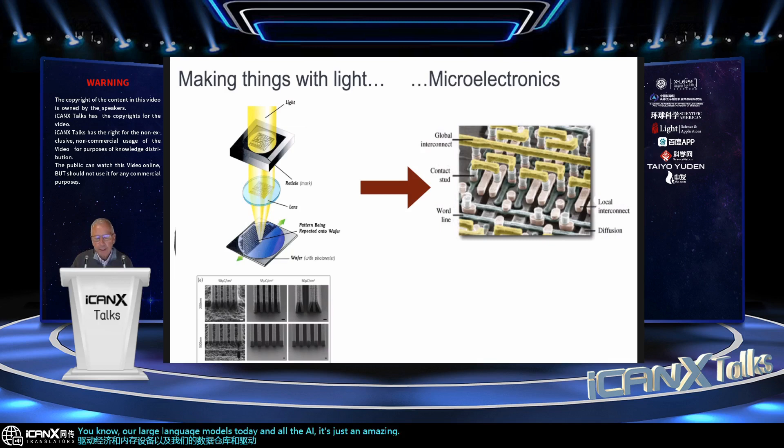And this is the foundation for building some of the most complicated structures that humans have ever fabricated at a really small length scale that looks like a city of streets and buildings. These are the integrated circuits that drive the economy and memory devices and our data warehouses and driving our large language models today and all the AI. It's just an amazing technology that's had its roots over the years.

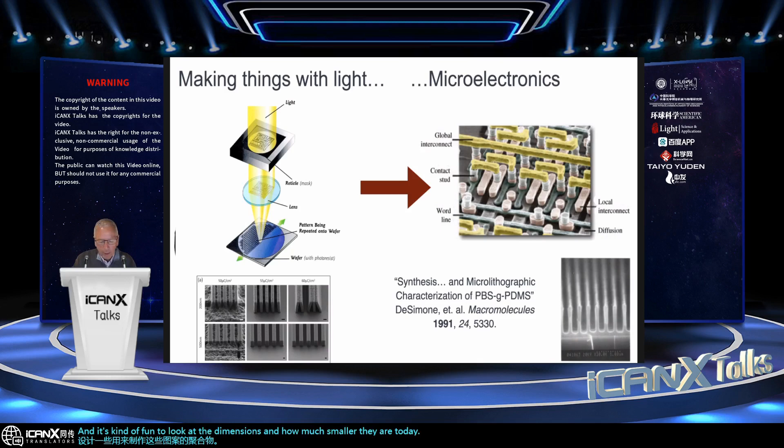And this was my first paper shortly after I got my PhD, when I already started my first faculty position, designing some of the polymers used to make these patterns. And it's kind of fun to look at the dimensions and how much smaller they are today relative to where they were when I started. So this is the area of microelectronics and photolithography.

And just to capture it a little bit more clearly, this is a wafer. This is a video from Zeiss. You'll see the polymer solution poured onto a wafer that's spinning, making a really uniform thin film. And then you'll see the patterns of light impinge upon that film and inducing chemistry in the film.

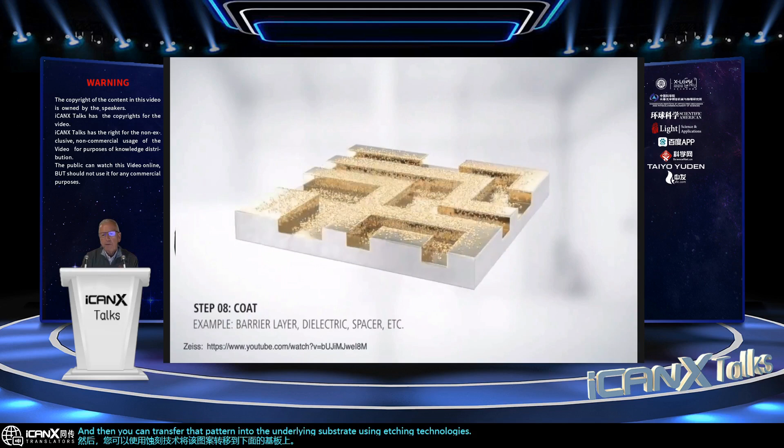That chemistry, once it's exposed, can be developed, and then it could be removed using a solvent selected for one area versus the other area. And then you can transfer that pattern into the underlying substrate using etching technologies. People often put down barrier layers, different kinds of spacers, and then they fill up these layers with metal.

They often overfill them because it's hard to control, and then they polish it back using chemical mechanical polishing techniques. And there you have a pattern, a layer of metal. And then this gets repeated over and over again, and there's often like 7 layers of metal building up these structures, and then that wafer gets sawed apart, and we have all the individual chips that make up our memory devices and our integrated circuits.

So that's the microelectronics industry in a nutshell. Again, all driven by patterns of light, mostly in 2 dimensions. And so when we think about this length scale of making things, and you think about what the microelectronics industry has done, think about something we're all familiar with, like a red blood cell. A red blood cell has a diameter of 8 microns.

And so just to put a biological context on this, Moore's law is basically taking us over the last 50 years from single-digit microns or tens of microns down to tens of nanometers, even single-digit nanometers. It's been a remarkable field, driving things down in that direction. But that's using light to make things that are very small without molds.

And we really started to reflect more and more about, can we use light to make macroscopic things, bigger things, things that we use every day in our lives, medical devices, consumer products, industrial parts, components of cars, using light instead of molding technologies. And well, if we wanted to do that, what are the foundational principles over the last 50 years in the microelectronics industry, and how can we relate the 2 together?

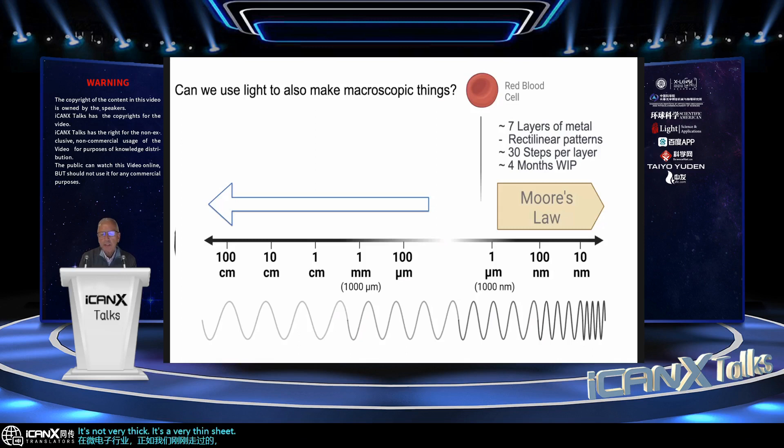Well, in the microelectronics industry, as we just walked through, it's not very thick. It's a very thin structure. There's only typically about 7 layers of metal in the most advanced chips made today. The light is basically making a 2-dimensional pattern. People don't really care so much in the 3rd dimension because they use 2-dimensional thinking to make things layer by layer. And the patterns are all rectilinear. The cross sections are squared off as they make individual patterns.

And it's not uncommon, as I showed you, to have 30 steps per layer. Very complicated to make these layers and transfer them into different components or different materials or different sublayers. And it's not uncommon for a wafer in the microelectronics industry to be in process for like 4 months. It's remarkable. A wafer going through a factory round and round and round, by the time you saw it into the individual chips, it's typically in manufacturing for 4 months. Well, that's a remarkable industry, the microelectronics industry.

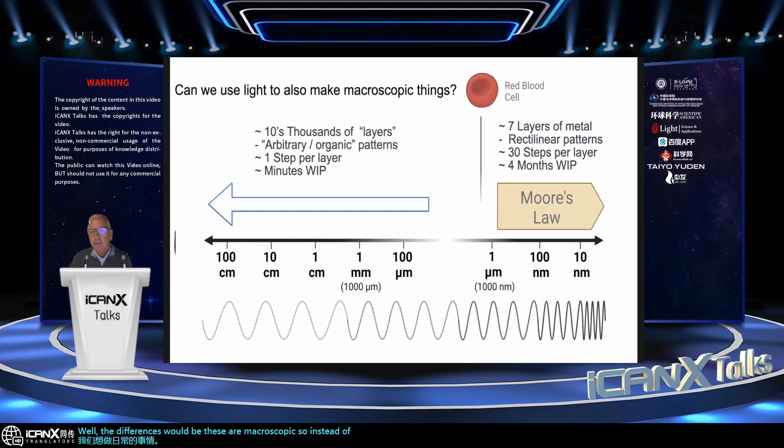If we wanted to make everyday things, well, the differences would be these are macroscopic. So instead of just simply 7 layers, something very thin, we're going to need tens of thousands of layers to make a macroscopic object. The patterns can't all be rectilinear. You're going to have organic kinds of patterns, arbitrary patterns. And boy, if you got tens of thousands of layers, you're not going to be able to afford more than 1 step per layer. It's got to be rapid. And you certainly can't afford something like a running shoe or a medical product to take 4 months to make it. It's got to be made in minutes.

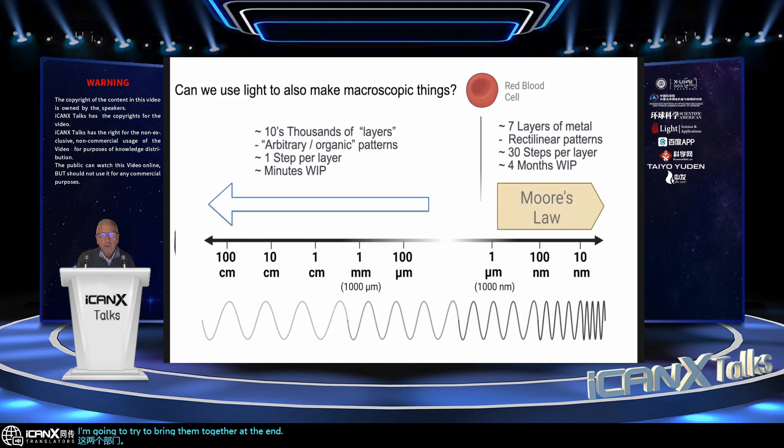So this is the challenge of thinking about using light like we did in the microelectronics industry for making everyday things. And I think it's helpful to think about this contextualization of these 2 sectors. I'm going to try to bring them together at the end, but let me just walk you through this first. So we developed a process that really focused on taking 3D printing from a simple prototyping technology into a manufacturing technology. And so you can think of this as manufacturing science. And we published this paper almost 10 years ago now.

And the approach was to use patterns of light. We're going to use it at 385 nanometers. We're going to be projecting it in a movie, basically, a 2-dimensional pattern, but we're going to be changing it quickly. We got to really speed this up because we want to make things in a manufacturing sense. But the key is that the light is going to be passing through a window at the bottom of a reservoir that contains an organic resin that's light sensitive, kind of like a photoresist, but different. But the key is that this window is not only optically transparent, but it's also permeable to oxygen.

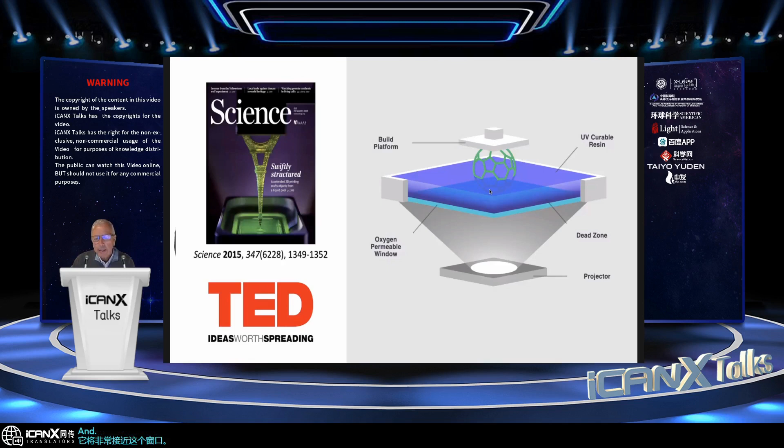And so as you lower this platform that's going to be holding the object, it's going to get very close to this window and not touch it, but close, maybe 100 microns, and it will start projecting light. And I'm going to be showing you a video of a process making the object on the left. This object's a pretty complicated air duct for an advanced aircraft. It's going to be made out of very thermally stable resin, resin that's got a glass transition temperature at 230 degrees Celsius with almost a 4 gigapascal modulus, an amazing material that's going to be crafted from light.

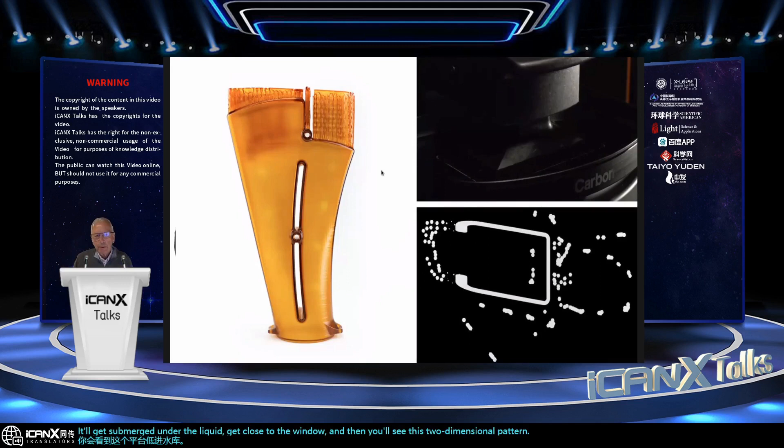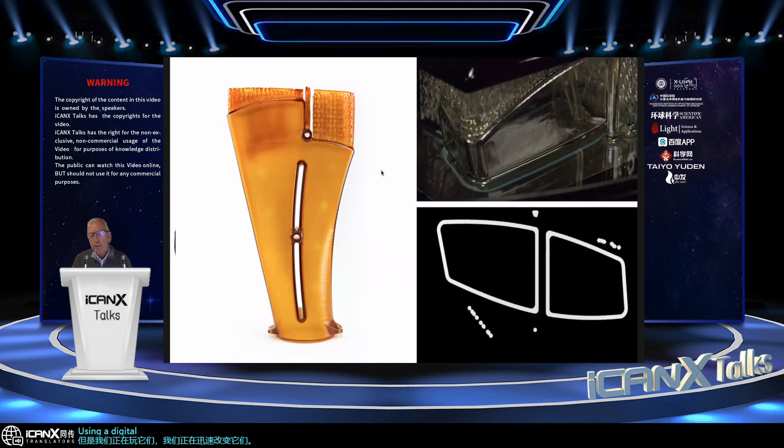You'll see this platform lower into the reservoir. It'll submerge under the liquid, get close to the window, and then you'll see this two-dimensional pattern of light from underneath that represents a cross-section of the object on the left. And these are static images, but we're changing them rapidly using a digital micromirror array device. And we're projecting that up through the window.

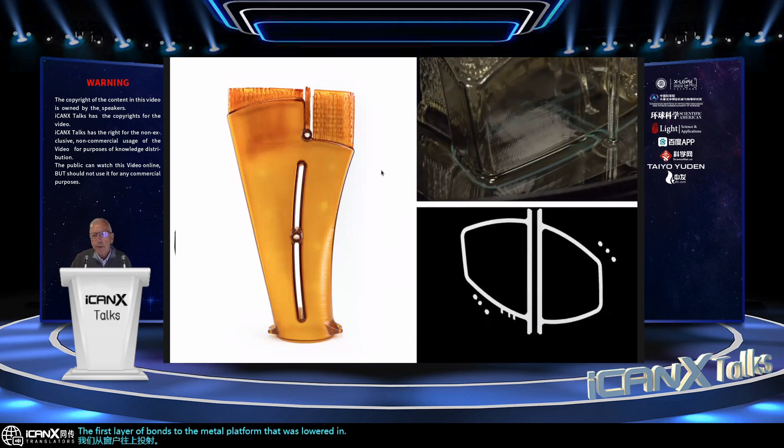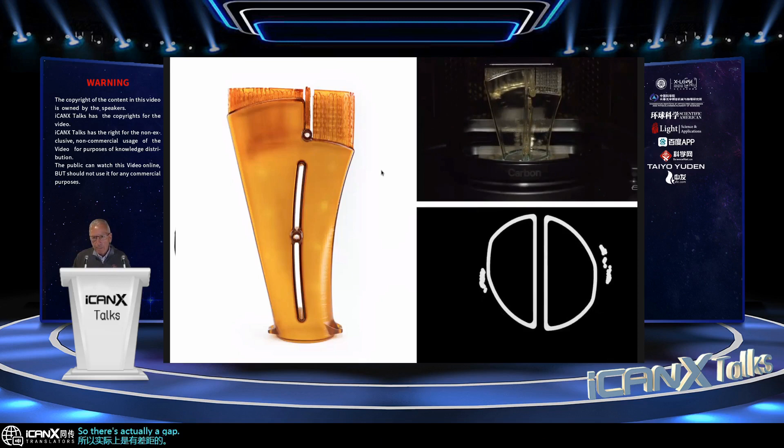The first layer bonds to the metal platform that was lowered in, but it doesn't bond to the window because of the oxygen that's coming through the window. Oxygen inhibits the photochemistry that the light is triggering. So there's actually a gap between the part and the window that's submerged under the liquid. And as you pull the object up, it's drawing liquid underneath it to renew the resin at the build interface.

And this process, this combination of approaches, allows 3D printing to go from maybe 100 to 1,000 times faster than a traditional layer by layer approach. Now, how do we change images quickly? Well, that's known technology out there. These are digital micromirror devices, DMDs. Texas Instruments is one company that pioneered this.

These are millions of little mirrors on a chip, and we use light from an LED at 385 nanometers that illuminates the entire chip. And then there's little mirrors on the chip that deflect light in different directions that allow it to create patterns. And so we can change a static 2D image rapidly using this device, and so it looks like a movie. So that's critical for what we're doing.

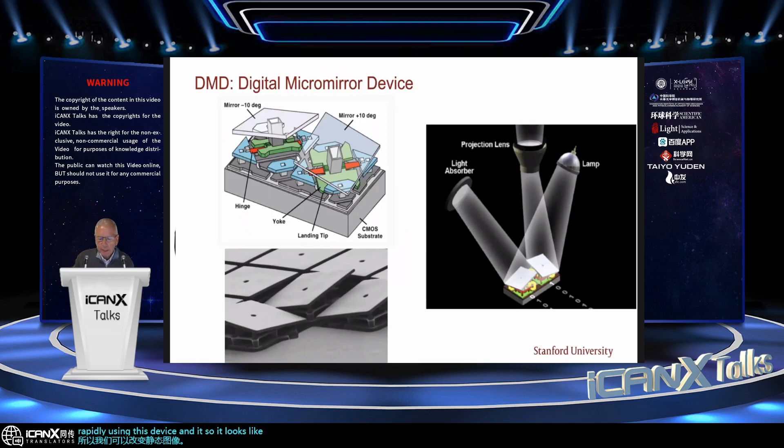And the window that we use is a special material. It's a composite. It's pretty complicated, but the key ingredient is a fluoropolymer known as amorphous Teflon. It's a copolymer of tetrafluoroethylene and a fluorinated dioxole monomer. This is some material that we worked on extensively in the early 1990s. It's an amorphous form of Teflon that's optically transparent.

It's chemically resistant to almost everything. It's very thermally stable, photochemically stable. But the key is it's among the most oxygen permeable materials known. So it's not too different from a contact lens, something that we all are familiar with. It's optically transparent, obviously, and permeable to oxygen. So it's a close cousin to that kind of material.

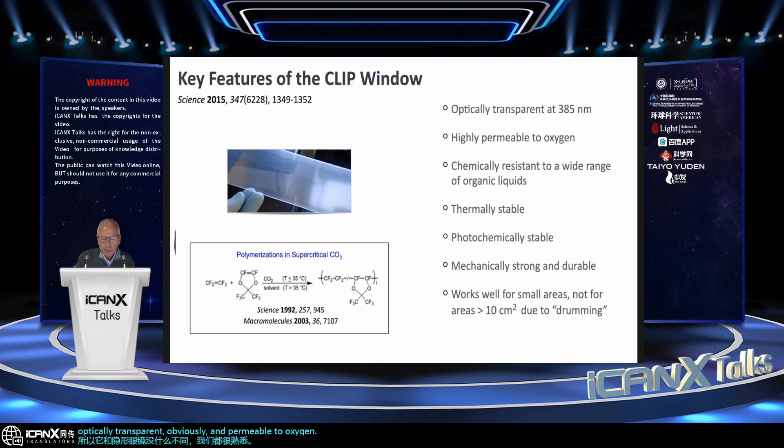Normally, with a normal 3D printer, that gap doesn't exist. The layer will bond to the window. And then when that happens, in order to do the next layer, you have to fracture it off the window, pick it up, allow resin to go back in, put it back down and image again. But this allows us to do this in a much more rapid way.

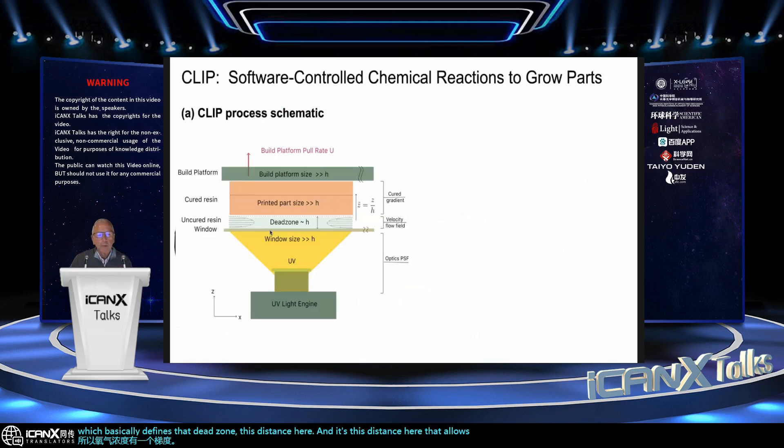And it's this distance here that allows us to do the resin renewal. And we've worked out all these details. It's taken us a while, but I think of this as a software-controlled chemical reaction to grow parts. It's a beautiful intersection of fluid mechanics, reaction chemistry, reaction engineering, mechanical properties coming together, because you need to know the mechanical properties of the part.

There's a lot of forces on the part. Think about if the part's elastic and soft, and this part is very close to another solid surface with a liquid between it, and there's something called a Stefan adhesion force. So just think about if you have a drop of liquid between two plates of glass, it's hard to pull them apart, but that's basically what we're doing. And if one of those components was elastic, it can deform, and you have to work in all those mechanical aspects.

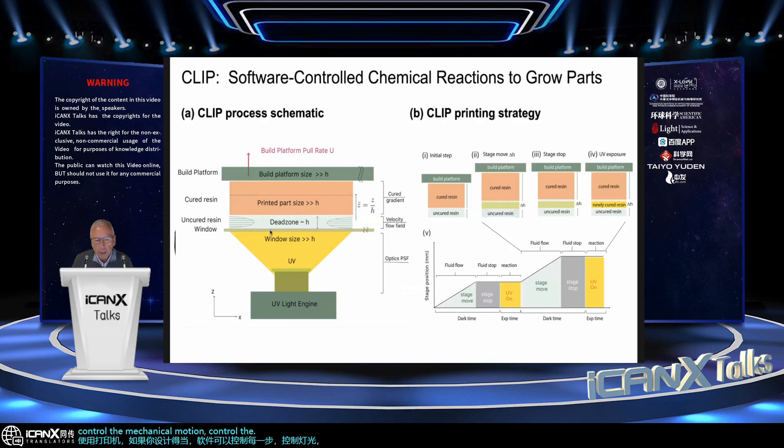But every aspect of the process can be adjusted using a printer, if you design it properly, where the software can control every step, can control the light, control the mechanical motion, control the oxygen. All these things come together. And we spun out a company to really master this, because it took a big investment to pull this together. And we built a business around this, and the company's called Carbon.

This is what the printers look like. And the printers are designed with a subdiscipline of engineering called mechatronics. In fact, the founding vice president of engineering that I hired, Craig Carlson, was the founding VP of engineering at Tesla. He got to Tesla before Elon got there, and I hired Craig, and he basically ended up hiring over 50 Tesla engineers to join us at Carbon.

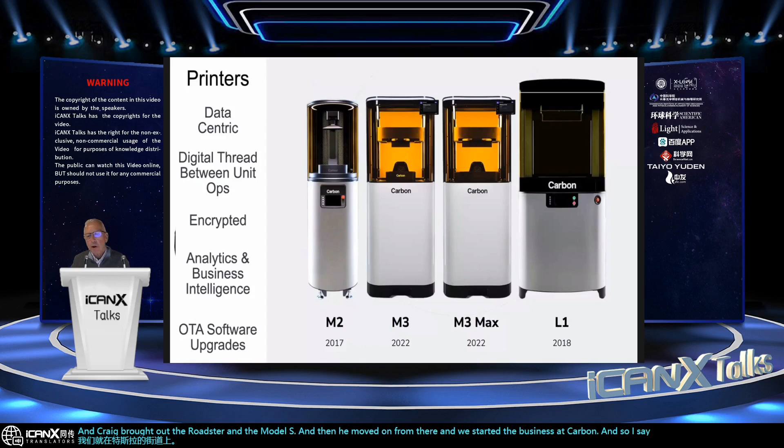We're just down the street from Tesla, and Craig brought out the Roadster and the Model S, and then he moved on from there, and we started the business at Carbon. And so I say that because the Tesla car is basically built with the same subdiscipline in mechatronics, software control, hardware, and we have the same DNA built into these printers. So these are connected products.

We can push software over the air every 6 to 8 weeks and do upgrades, over the air software upgrades. And you basically have a network effect. The more people use the printer, the more you learn. You can turn those learnings into new software and push them out again. And as more and more people use the printer globally, the better they get. And the printers are now in over 19 countries around the world.

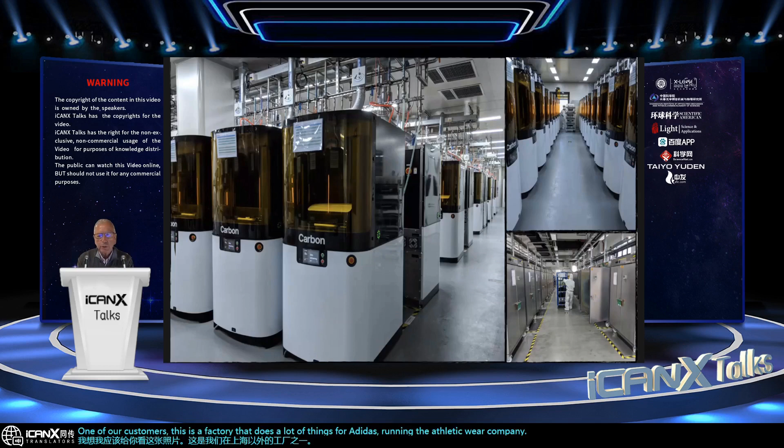And I thought I'd show you this picture. This is one of our factories outside Shanghai, and one of our customers. This is a factory that does a lot of things for Adidas, the athletic wear company, and running shoes. And this is what that looks like. And it's not only the printing process, but it's all the unit operations needed in manufacturing.

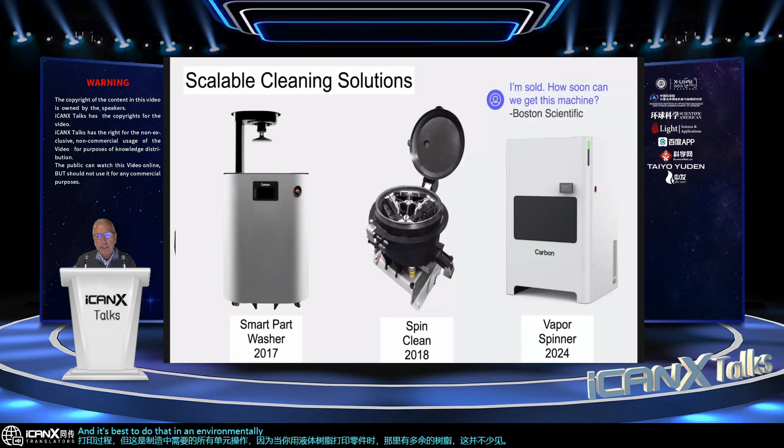Because when you print the part with a liquid resin, it's got excess resin on there, and it's not uncommon you need to get that resin off. And it's best to do that in an environmentally stable way. And one of the best ways is to do a spin cleaning process. And we're able to do that. And I've got some new advances that the company just introduced recently with a little video here.

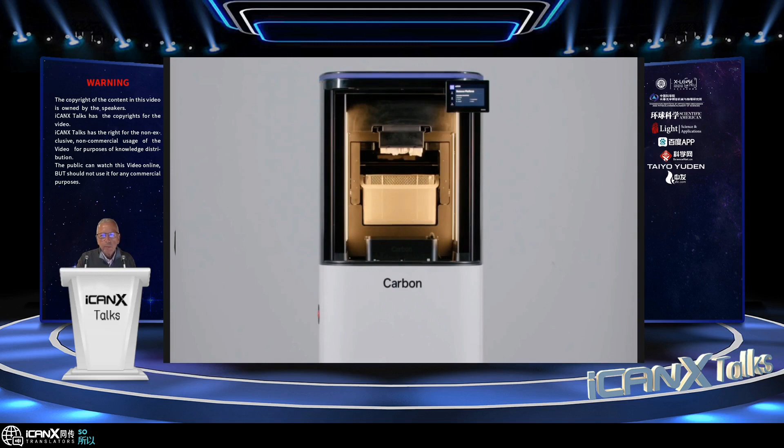So these are all the things you need to do to put together a factory using chemistry. And that resin I showed you there was a pretty simple resin, but there's need for more complex resins. And up to this point, most people realize that light alone is not a great way to make most polymers. Most light-based processes for making plastics lead to brittle plastics. They're useful for some applications, but not advanced resins that would be elastic or have a glass transition temperature that would be useful for aerospace applications, for example.

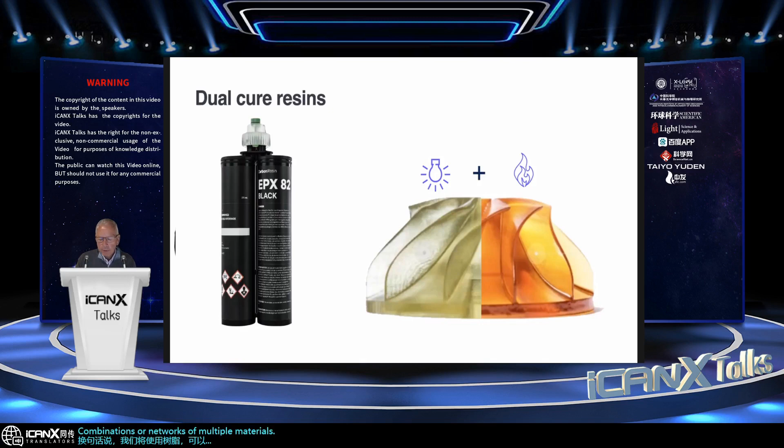And so with that challenge, we developed what we call dual cure resins. In other words, we're going to use resins that can be combinations or networks of multiple materials. And let me show you one example of that. And that's an epoxy system. This is a light-based epoxy resin, and it uses orthogonal chemistry. That is chemistry that can operate using light.

And so this will be a diacrylate-based system or a monoacrylate system that can be free radically polymerized with a photoinitiator. And that can operate completely independently of epoxy chemistry, this diepoxide and a diamine. So you can mix all these reagents together as a formulation, and they often come in 2 tubes because of the reactive nature of these.

And you pour that into the reservoir and you print it at 385 nanometers and you generate an object. But the light curing component might only be 20 volume% of the resin. The other 80% is the epoxy chemistry. And so you make a fairly weak object, mechanically weak object, that is basically a network that contains other monomers that you can then do a solid state polymerization with to mature the properties. So it's a 2-step process using orthogonal chemistry.

My colleague here at Stanford, Carolyn Bertozzi, just got the Nobel Prize for doing orthogonal chemistry in a cell. She does chemistry in a cell that doesn't screw up the biochemistry of a cell. Well, this is orthogonal chemistry in the 3D printer. We can use light to set the shape, and then we use polymer science to set the properties.

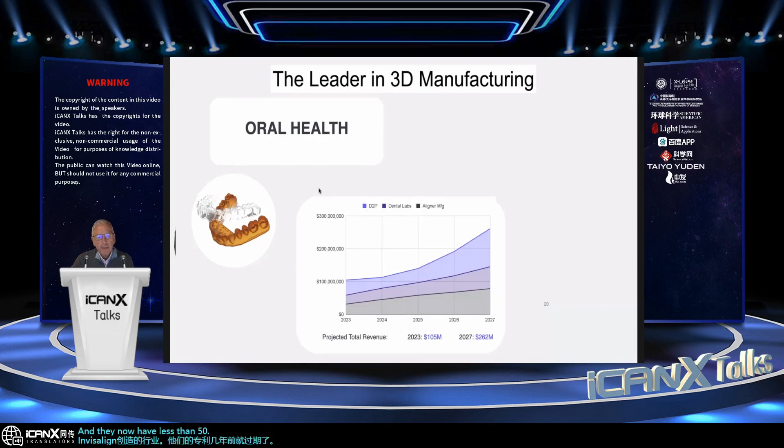So the business is heavily started in oral health. The industry that Invisalign created, their patents expired a number of years ago, and they now have less than 50% market share of their industry, and now we basically power the rest. We introduced the world's first FDA-approved 3D printed dentures. We have over 500,000 people now wearing dentures.

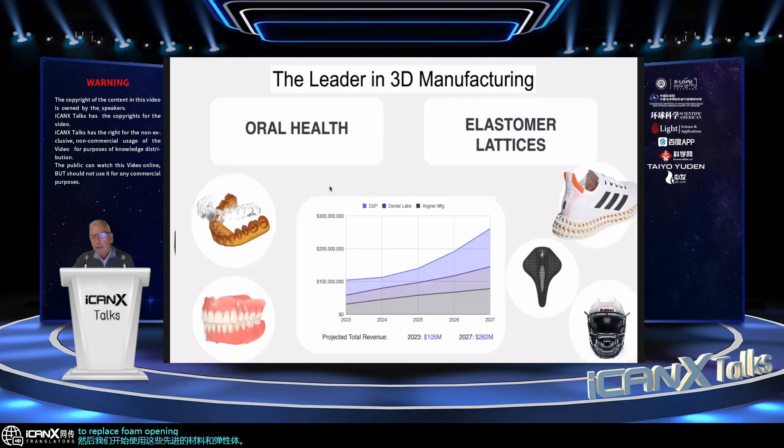And then we started these advanced materials and elastomers to replace foam, opening up energy returning materials, energy dampening materials. And now we're heavily involved in the injection molding marketplace. Rigid plastics with amazing ductility or high impact strength, powering all sorts of industries from the automotive industry, the aerospace industry, to the medical device industry. Very exciting place to play.

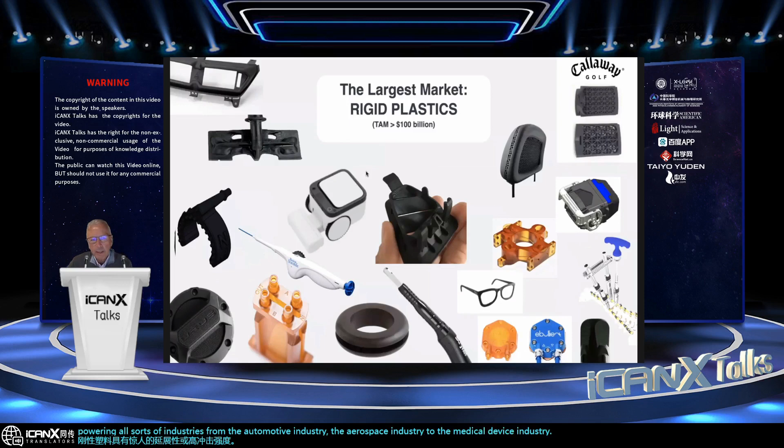And what's really driving this digital world is a fundamental change in design. The classic product design cycle starts with designing things in your favorite CAD software. And when you go from bits to atoms and you enter the real world, you go to typically a prototyping technology. That is to make a physical object of what you designed. It's not often the same technology to make something. It's often not even the same materials, but you do that to see if it's properly designed, because you're going to cut a piece of steel, a molding technology, in order to make the object at scale.

This disintermediation of the manufacturing process, where people are now designing products on the means of production, dramatically enhances product innovation. You can be designing something on Monday morning and testing it out Monday afternoon. It's remarkable. So, the speed of the printer is essential, but this is where the speed of innovation happens. This is where it unlocks people's ideas and moving products forward.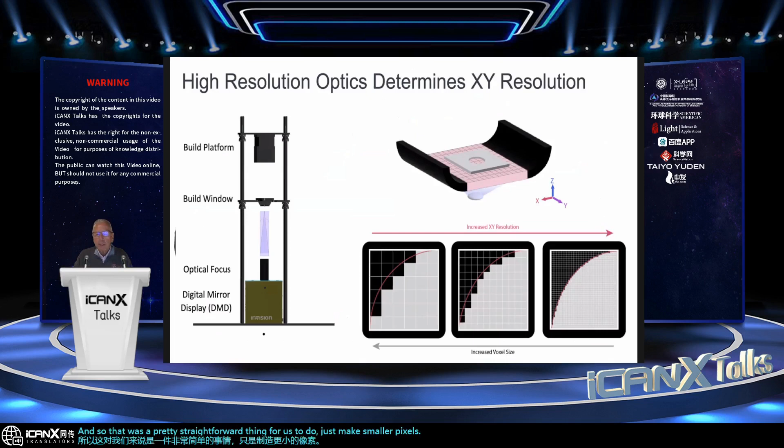First, we have to think about challenges in XY versus Z. Now, the microelectronics industry typically is XY resolution mostly. And so that was a pretty straightforward thing for us to do. Just make smaller pixels. We can do that using optical techniques and software techniques and increase the resolution of our printers. And when we do that, we can print objects that can be scaled down.

And so we just published this paper not too long ago, and this is what the Eiffel Tower looks like printed on the Carbon printer, 75 micron resolution. This is what the Eiffel Tower looks like using the same physics and chemistry I just showed you at 30 micron resolution. And now we see that little guy right there. And that's made with a printer with 1.5 micron resolution that my students at Stanford built.

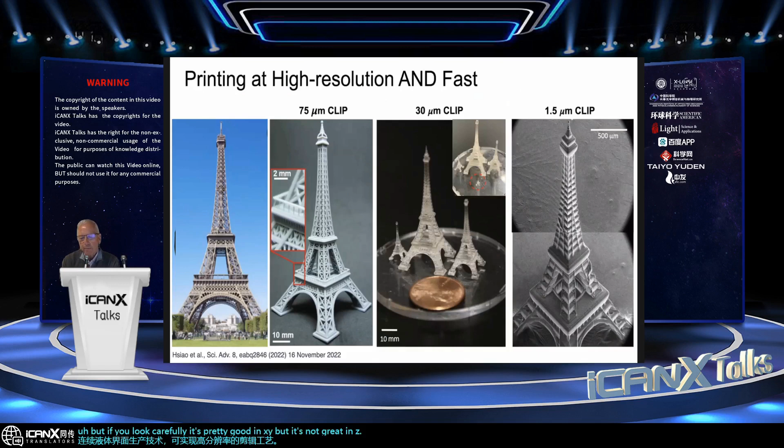And so this is a pretty exciting development that allows us to use the same continuous liquid interface production technique, the CLIP process, at high resolution. But if you look carefully, it's pretty good in XY, but it's not great in Z. And I'll come back to that in a moment. But first of all, just think about XY. When we're making small things, we need to scale them up, and it doesn't take very long to print these.

And so what we decided to do was to put a roll-to-roll process together, interfacing with the 3D printer. Basically, we're going to print the objects using the classic process I showed you, but instead of printing on a platform, we're going to print on a web. It comes through the printer and is adhered onto the platform. Once we print, because it just takes a few minutes, we can advance the film and just allow this to be done over and over again.

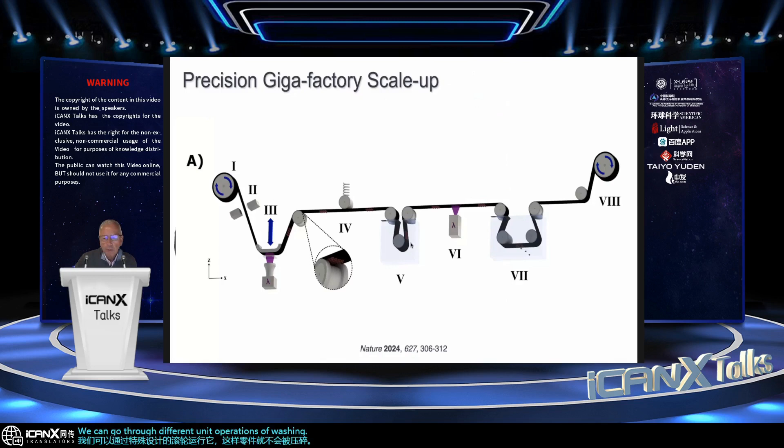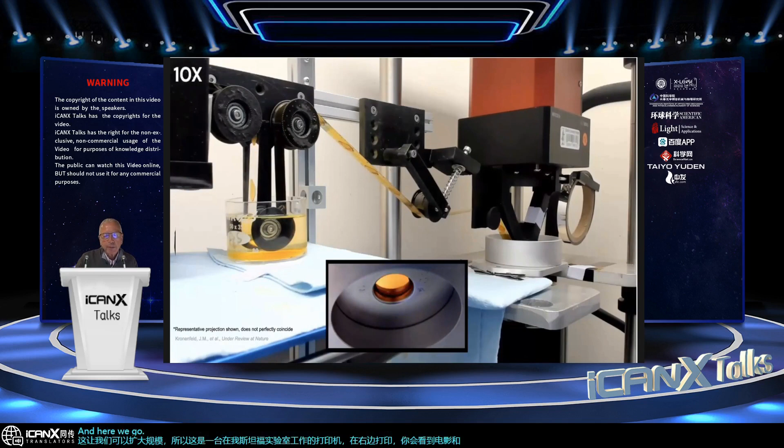We can run it through specially designed rollers so the parts don't get crushed. We can go through different unit operations of washing and post-processing. And this allows us to scale things up. And so this is a printer operating in my Stanford lab. It's printing on the right. You'll see the film advance. And then we go through these different steps. And this allows us to really scale things up and move things forward.

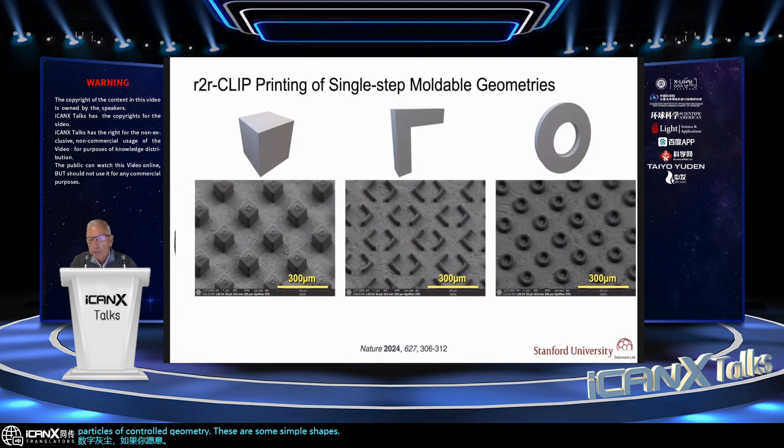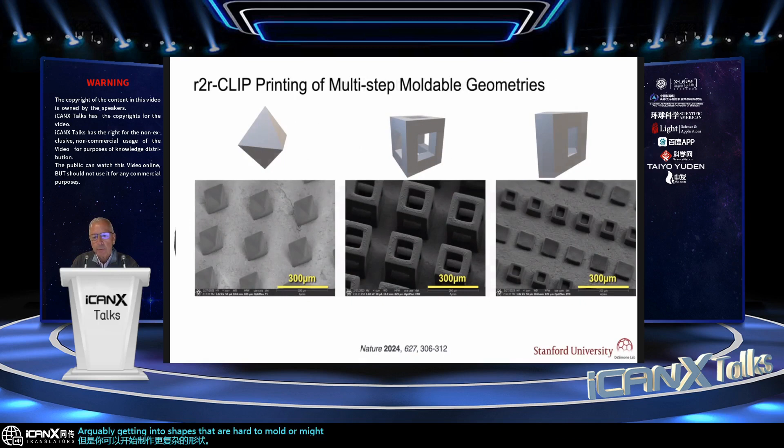And so with that, we're making particles, digital dust, if you will, particles of controlled geometry. These are some simple shapes. You could mold shapes like this using imprint lithography. But then you can start making more complicated shapes, arguably getting into shapes that are hard to mold or might be impossible to mold based on their symmetry designs, and really complicated structures that arguably are impossible to mold. But that's the beautiful thing about light. Light can craft things that are unmoldable using these processes.

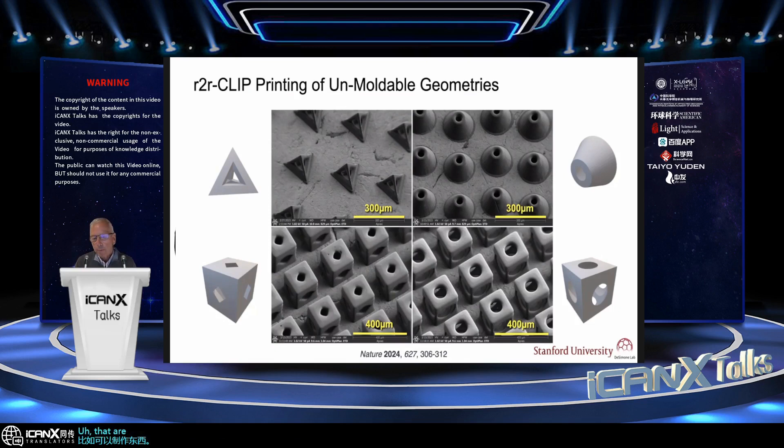And these are some of our particles, working with Heinrich Jaeger at the University of Chicago, suspended in a node of a sound wave. And we can watch the physics of these particles, which are beautiful to see, the interactions of these shapes coming together, and look at their aerosol properties and the like. I love this particular video here. I could watch this for hours on end, these little tetrahedra coming together, doing these little dances. And we look at particle jamming transitions and the like, as they interact based on size exclusion and shape specificity.

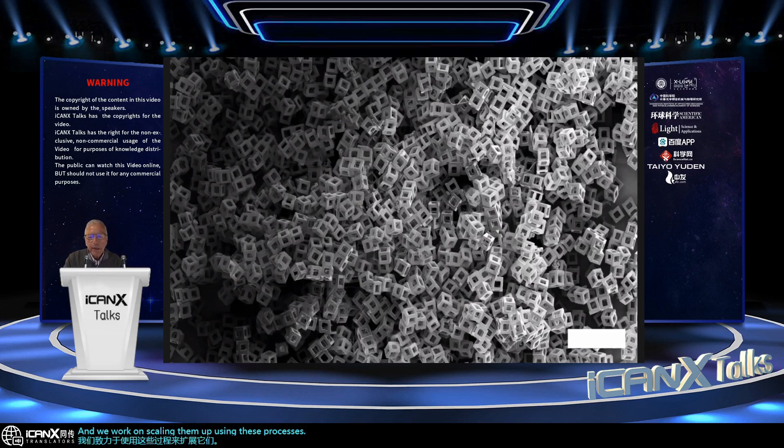And we work on the details of these particles, and we work on scaling them up using these processes. So we're excited about where these can go and opportunities in material science and biotechnology. And it's a beautiful sort of demonstration.

But resolution is not just an XY game, it's also a Z game and a Z-axis. But hold that thought. We recently developed a process that's a cousin to what we started with. Remember I showed you that the chemistry and physics of the CLIP process, as you pick a part up, you generate a negative pressure in the bottom of the part, and it draws resin in from the periphery. And so this is showing you the resin flow from the periphery to the center of this conical shape here.

Well, we recently introduced a process that, instead of just relying on suction forces, we decided to design a very similar part, but now we have a microfluidic channel in the part that's part of the CAD file, and we fluidically connect it to a port in the platform so that we can now mechanically inject resin into this gap. So using mechanical forces instead of suction forces.

Now, mechanical forces can be really high. In fact, instead of the object sticking to the window and you're trying to lift it up like two plates of glass with a drop of water between them, now we're injecting resin into that gap, and it's kind of like a rocket engine. You can actually push it off the surface if you're not careful. And so you have to control forces here even more carefully.

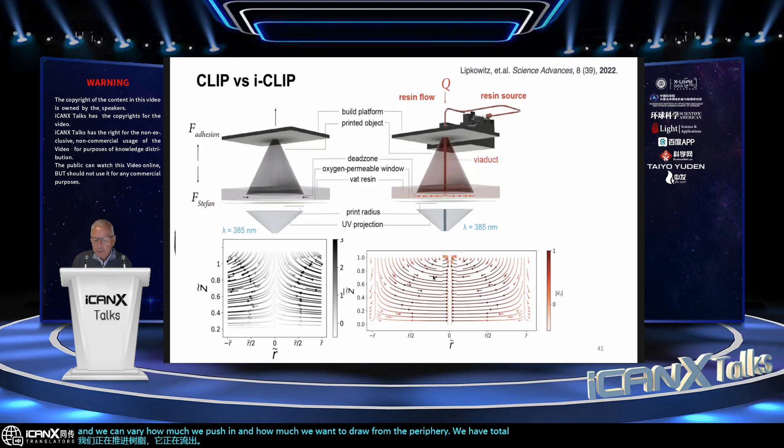But what's happening is now you're mechanically pushing the resin into this gap, and the fluid mechanics is completely reversed. We're pushing resin in and it's flowing out, and we can vary how much we push in and how much we want to draw from the periphery. We have total control of both sources of resin. But what we found is that we can now make the 3D printing process go another factor of 10 faster. We can actually have different resins coming in from different ports and do multi-material printing. We've published on that recently.

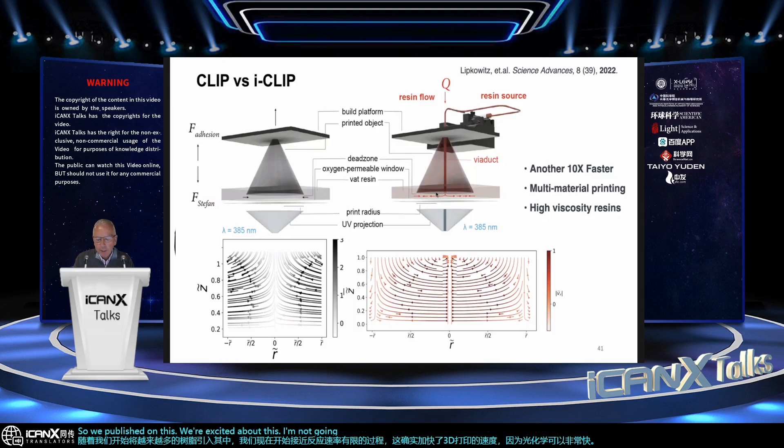And this gets us into high viscosity resins that would be arguably hard to bring in from this gap that's maybe only 20 microns thick. And so the chemistry here historically has been a mass transfer limited process. And as we start bringing more and more resin in, we start moving closer to a reaction rate limited process, which really speeds up the 3D printing, because the photochemistry can go really fast. So we published on this. We're excited about this. I'm not going to dive too much into this, but we learned something we didn't expect.

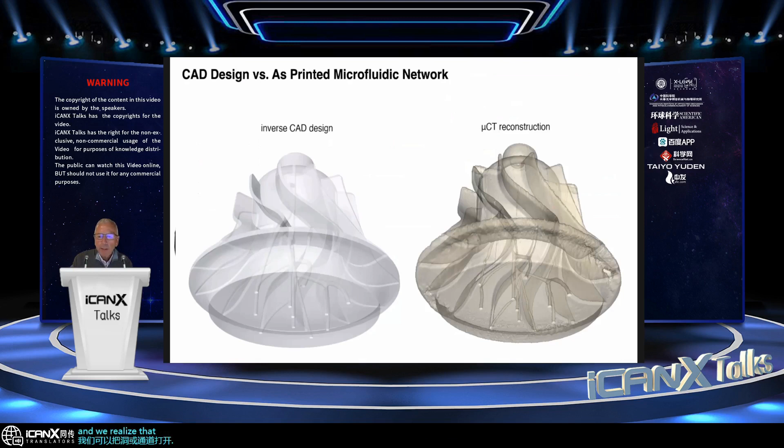One of the interesting things was that if we actually tried to make a part with channels in it, and we used the traditional CLIP process, those channels would be closed up. They would be over-cured because light from subsequent layers would cure the resin that's in those holes. But when we were pushing resin through the part, we could keep the holes or the channels open. And we realized that the resin that's being pushed in also has oxygen in it.

And so what's interesting to think about is, back to resolution, when you bring light through a silhouette or a mask, it's contained in the XY direction, but light is tenacious in the Z direction. It goes where it wants to go based on the molar absorptivity of the medium. But when your layers are thick, that's okay. And that's what we do at 75 micron resolution with 50 micron thick layers, for example.

But when your layers are only a micron thick, the light will go way further than you want. And that leads to overcuring of resin in previously made layers that might be uncured, that had a negative space that you wanted to keep negative, but now the light crosses over to it, curing it without wanting to.

So we have a paper pending now. My student Ian Coates has shown that if your channels are vertical, there's no worrying about stray light curing it because the light's just going straight up. And you can make a vertical channel with the traditional process and the injection process. But once you have channels deflecting at an angle, as you start making the follow-on layers, this channel's got resin in it, and the light can stray beyond the layer and cure it.

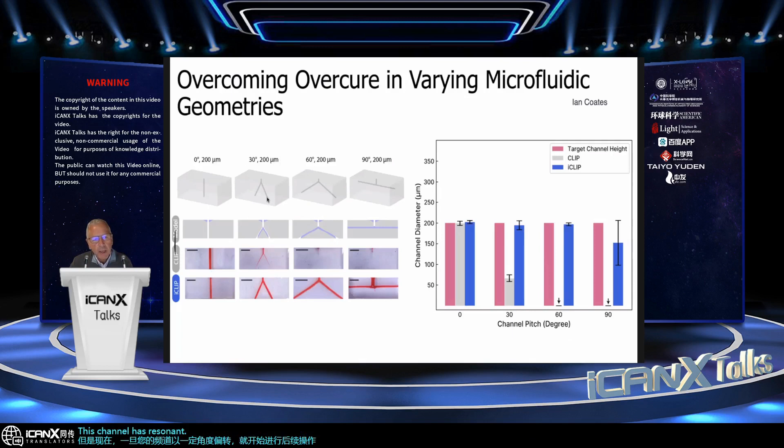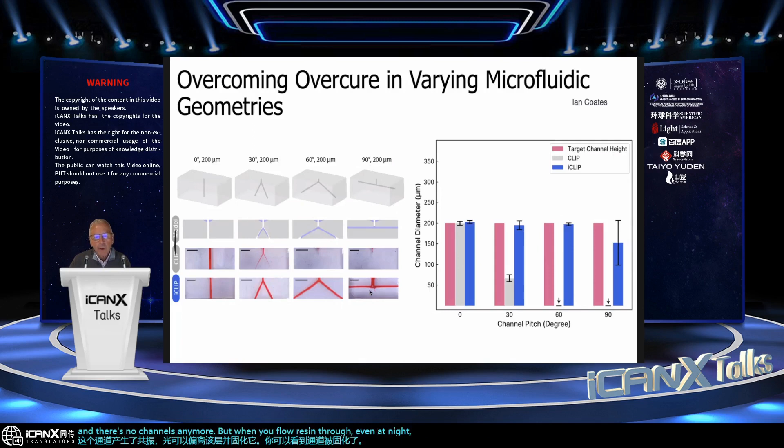And you can see that the channels become cured, and there's no channels anymore. But as you flow resin through, even at 90 degrees, we can keep the channels open. And so now this opens up free-form microfluidics. Really amazing space to play now.

Most 3D printers have not been amenable to microfluidics. Typically, microfluidics are made using the tools of the microelectronics industry, layer by layer. But now we have free-form structures, and we're having a lot of fun now making amazing things in this space. And one of the places that I want to focus on here is we're using this technology to make microneedles and microneedle arrays, especially for delivering vaccines.

And most of us around the planet are now vaccinated from COVID. And those, if you got a Moderna or a Pfizer vaccine, it was an intramuscular injection deep into the muscle. But the target cells for that vaccine were the migratory immune cells. And we humans have 100 to 1,000 times more migratory immune cells in the dermis of our skin than we do in our muscle. And we miss the majority of the cells when we use an injection into the muscle.

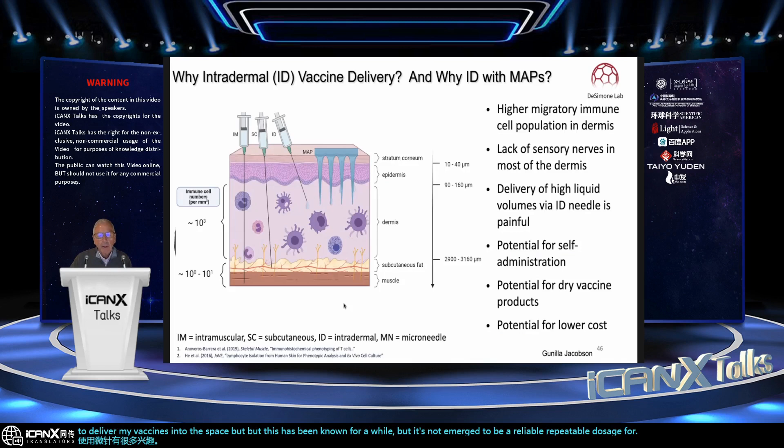There's a lot of interest in using microneedles to deliver vaccines into this space, but this has been known for a while, but it's not emerged to be a reliable and repeatable dosage form. And I would argue that the designs that have been used in the past are part of the challenge. So let's look at microneedle history.

Microneedles were established in the 1970s. They were made using the tools of the microelectronics industry to etch silicon, making a uniform array of needles that could be coated and deliver products into the dermis. We call these Gen 1 microneedles. Transformative idea, but very limited materials and designs.

Then in the 1990s, George Whitesides and John Rogers and others started developing molding technologies, soft lithography, imprint lithography. And you can make a master template etched in silicon. You make a mold of that, and now you can make replicas of that. The designs were still the same as you etched in silicon, but you opened up the material space. Amazing new kinds of materials that you could use to make your microneedles from.

The sharpness wasn't quite as sharp as they were using the etching technologies of the microelectronics industry and Gen 1 techniques, but they weren't too bad. You lose some fidelity on molding. We call these Gen 2 microneedles.

But now, with scale up in 3D printing, we call these Gen 3 microneedles. And now we've got geometries that are impossible to make using the tools of the microelectronics industry. And this brings a lot of value in the delivery processes, the pharmacokinetics, which influences the pharmacodynamics of the vaccines. But now we can also make these microneedles with the injection CLIP, and they can be powered by microfluidics. And we call these Gen 4 microneedles. So let me show you a little bit about microneedles made using Gen 3 and Gen 4 techniques.

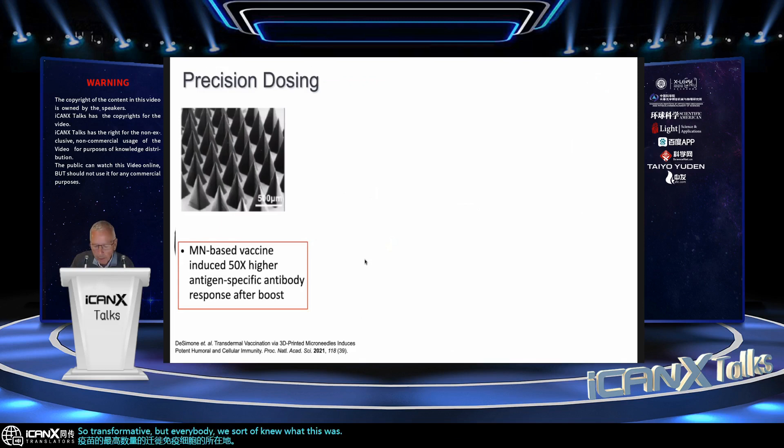But now, with our high-resolution printer, we're making needles we couldn't have even dreamt about in the past. And these are lattice microneedles with much higher surface area per needle, with new kinds of functionality. We can coat the needles with solutions that dry and leave a coating on the needles. But very excitingly, we can trap droplets of liquid through controlled interfacial tension in each needle. And we can deliver the liquid, mechanically protect the liquid in a lattice and deliver that into the dermis.

Or, and more excitingly, we could freeze dry that liquid, lyophilize it, and now we can have a solid product that might be mechanically fragile, like a cake of sugar, which is the typical lyophilization media. It doesn't have good mechanical properties, amorphous sugars even, where you trap the product as a dry product. Well, why would you want to do that?

Well, maybe that was a lipid nanoparticle vaccine formulation. Lipid nanoparticles in liquids are not stable for long periods of time. Remember during COVID, the cold chain issues. There was more talk about freezers during COVID than I think I've ever seen in my life. The challenge of global supply chains.

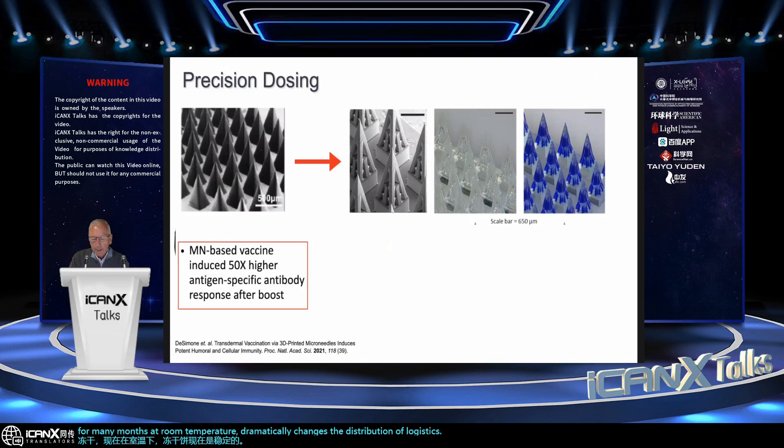Well, imagine if that were frozen, lyophilized, and now at room temperature, that lyophilized cake is now stable for many months at room temperature. Dramatically changes the distribution logistics around the planet. And what's cool about that is you can take these solid formulations, immerse them into an aqueous environment like your skin, and have your own interstitial fluid, the fluid in our bodies, reconstitute the vaccine in situ. So it really opens up global access in the vaccine space.

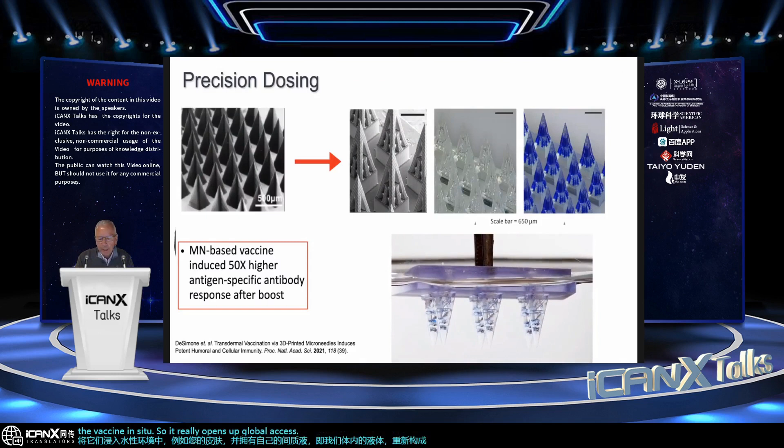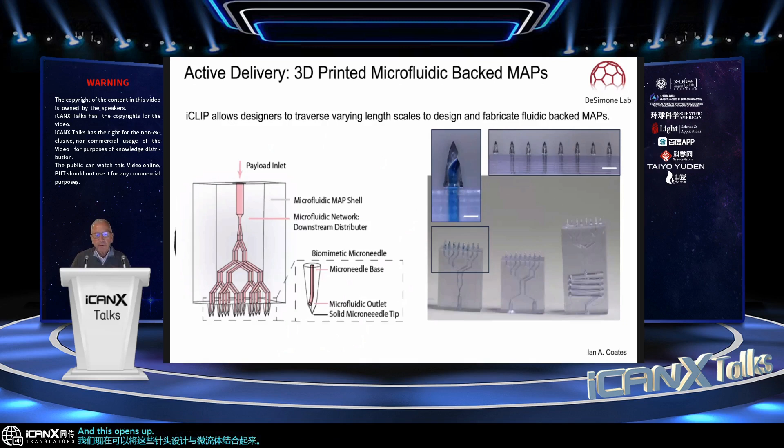And so this is what we're doing. And the lab is sponsored by the Bill and Melinda Gates Foundation, and we're now developing vaccines in this space, and we're excited to have their financial support. We can now combine these needle designs with microfluidics, and this opens up even larger volumes of liquids. And so this is some of our microneedle arrays with a fluid backing. And you can see we can deliver liquids, or we can deliver even multiple liquids.

So you think about some new drug formulations like the new GLP-1 agonists and maybe a myostatin that can be combined with these systems. Or maybe you can have a solid product, and then you just have a saline solution that can dissolve it out of these microneedle array patches and deliver a solid product instantly. So you can have slow release patches, you can have instant release patches, you can do large volumes of liquids. It really opens up a wide range of dosage forms going forward.

And we've now been able to show that we can deliver messenger RNA into the dermis and use some of these reporter genes, opening up all sorts of opportunities in vaccines. And that's a real exciting space to play. So that's delivering vaccines into the dermis, into the interstitial fluid region in the dermis. And interstitial fluid is interesting, very interesting. Humans have 3 times as much interstitial fluid in our bodies than we do blood.

Anne, who's on the panel here, and many other people are mining this interstitial fluid. Just think about the transformative nature of continuous glucose monitoring, CGM. It's really transforming diabetes globally, and it's really just the beginning. There's a lot of people targeting many different kinds of molecules in metabolic processes, but even well beyond metabolic processes. And so understanding molecular information at scale is really exciting. And interstitial fluid is a great way to think about that. And there's a lot of interest in these wearable sensors and sampling of this fluid.

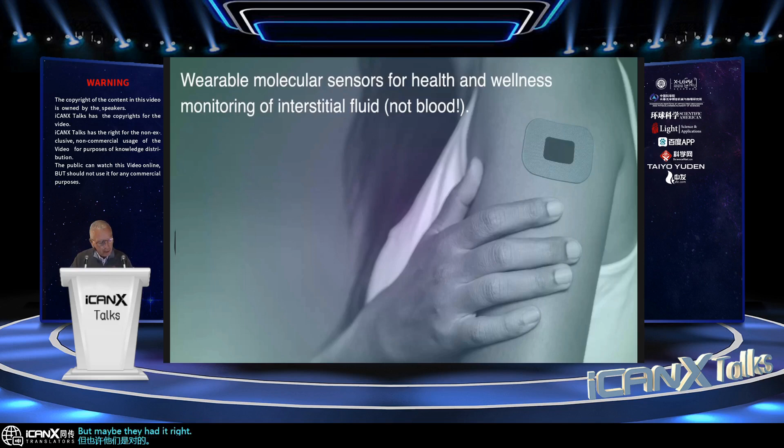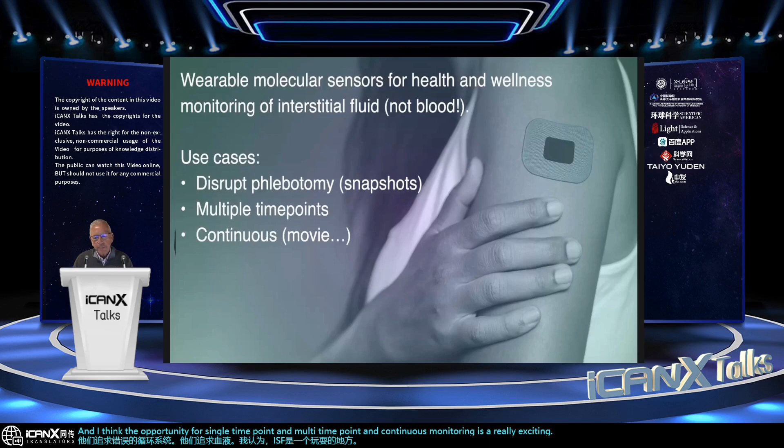And I often like to say at this point that there's a company in Silicon Valley known as Theranos. It was a debacle of a company for sure, but maybe they had it right in a way, except for the fraud, and they went after the wrong circulation system. They went after blood. ISF, I think, is a place to play, and I think the opportunity for single time point and multi time point and continuous monitoring is a really exciting space. And we're eager to explore that, and many others are.

And just to give you a glimpse, the interstitial fluid is rich in biomolecules. It's rich in immunoglobulins, proteins. There's actually more exosomes in interstitial fluid than there is in serum. And so people are looking at which molecules are found in both serum and in interstitial fluid, and which ones might be unique. And it's just a rich place to play, and we're very excited, and many people, including Anne and others, are in this space. So this is an area we're excited to look at.

But what's interesting is when you take a typical microneedle that looks like a syringe needle, just smaller. So think about a needle with a hole in the tip and just make it smaller and smaller and smaller. A microneedle with that geometry, when you push it into the skin, often gets clogged. These things are so delicate when they have a hole in them that they can clog. And one of my undergraduates at Stanford was thinking about this, and she said that, well, that doesn't happen to a mosquito. When a mosquito inserts a microneedle into the skin, or a bee. And well, why is that?

Well, if you look at the designs that Mother Nature has for microneedles, the hole is off to the side. It's mechanically protected upon insertion. Well, we can make that with light, and that's what we typically do. And when you do that, you can prevent the needles from clogging, and it really opens up this area of sampling interstitial fluid. And so we've got all sorts of designs and new concepts coming out where we're really setting records on ISF collection within minutes, getting tens of microliters collected, and we're excited about playing in a space really to transform molecular monitoring going forward, all enabled by new structures made with light that would be arguably hard to make otherwise.

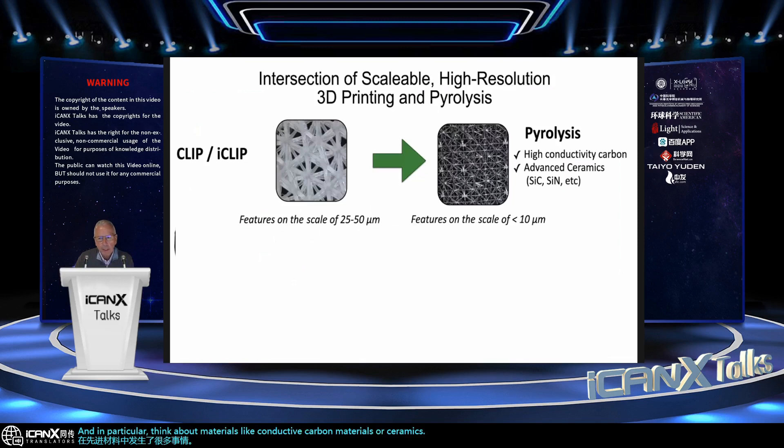There is a lot happening in advanced materials. In particular, think about materials like conductive carbon materials or ceramic materials, silicon carbide. This opens up so many different industries, from energy storage to the chemical process industry. The chemical process industry is an industry in the United States where apparently 30% of the CO2 that's emitted to the atmosphere in the US is emitted by burning fossil fuels that drive endothermic reactions in the chemical industry.

And there's a lot of interest in moving away from fossil fuel heating to electrical heating. The most energy efficient way to electrically heat is inductive heating. And so designing new kinds of heating systems integrated with fluid flow is a huge opportunity. A lot of these susceptors in inductive heating are made out of silicon carbide.

And so my group, along with people like Jonathan Fan and others here at Stanford, we're now using advanced 3D printing concepts, the high resolution ones I just showed you, with new kinds of materials that are precursors to ceramics and elemental carbon. What we basically do is we 3D print these advanced resins, and then we pyrolyze them at hundreds and thousands of degrees, which converts them to carbon and ceramics.

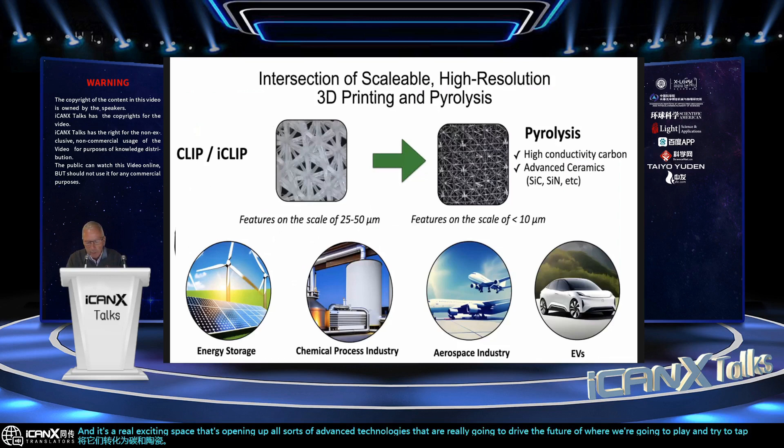It's a really exciting space that's opening up all sorts of advanced technologies that are really going to drive the future of where we're going to play and try to tackle some of the world's most challenging problems in these areas. So with that, let me end.

I am really fortunate to have an amazing group of students. At a place like Stanford, I've got students from different engineering departments: chemical engineering, materials science and engineering, mechanical engineering, computer science. I've got chemists, a really great group of grad students and postdocs, and a great team of staff that really drive the whole enterprise forward.

And we're really fortunate to have the financial support. Vision without resources is a hallucination, and we're really fortunate to have funding from the National Institutes of Health, Wellcome Leap, the Bill and Melinda Gates Foundation, and lots of support internal at Stanford.

And a great group of colleagues in chemical engineering and chemistry, both at Stanford and outside Stanford. And I showed some of their work. Eric Shaqfeh's been a partner in crime with us in so many different areas. Tom Soh and Sharon Pitteri on the interstitial fluid space. Jonathan Fan, as I mentioned, on some of the new things we're doing.